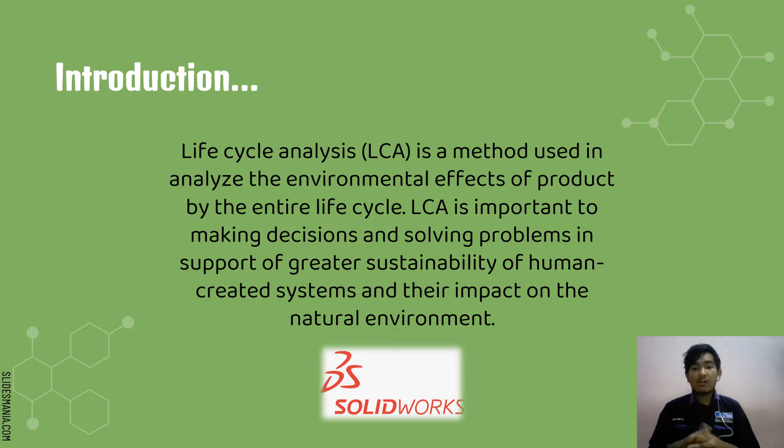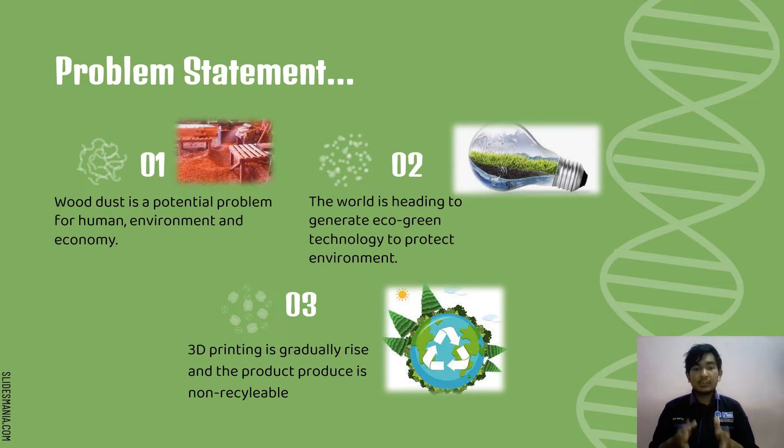This is my problem statement for my research. First, wood dust is a potential problem for human, environment, and economy. Second, the world is heading to generate eco-green technology to protect the environment. Third, 3D printing is gradually rising and the product produced is non-recyclable.

For the research objectives: first, to study and simulate life cycle analysis by using SolidWorks software. Second, to compare and analyze the life cycle analysis of wood dust reinforced polypropylene with polypropylene.

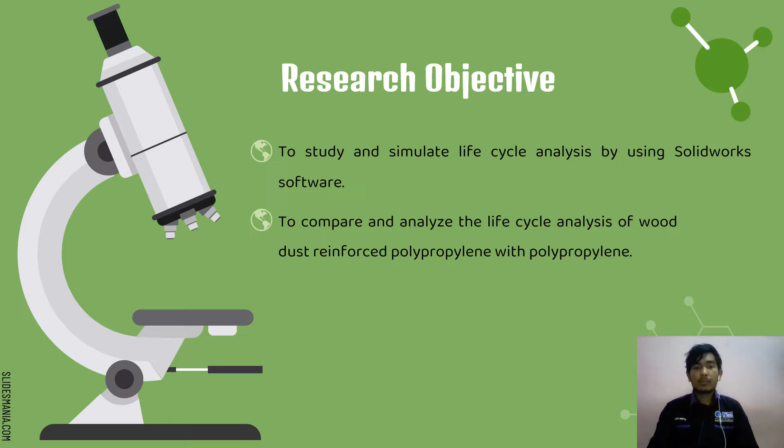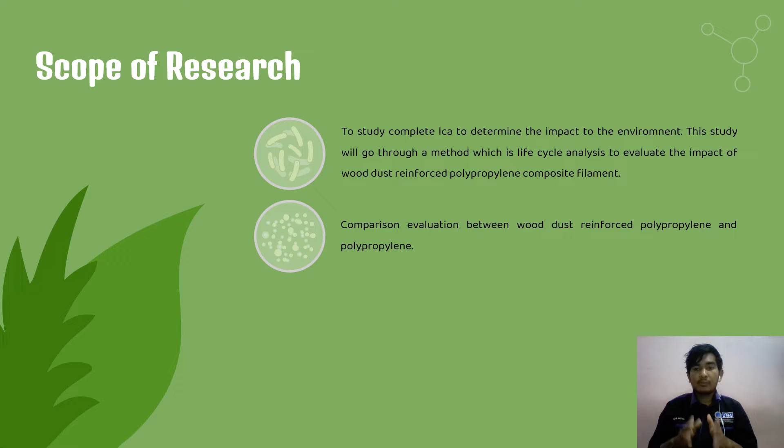This is the scope of my research. First, to study complete LCA to determine the impact to the environment. This study will go through a method, which is life cycle analysis, to evaluate the impact of wood dust reinforced polypropylene composite filament. Second, comparison evaluation between wood dust reinforced polypropylene and polypropylene.

This is the literature review for life cycle analysis. Guinée 2011 states that LCA is a means of evaluating the environmental effect of the production and use of goods, such as waste disposal or the provision of facility. Meanwhile, Saosee 2020 said that LCA is an ideal approach for analyzing the environmental effect of a product.

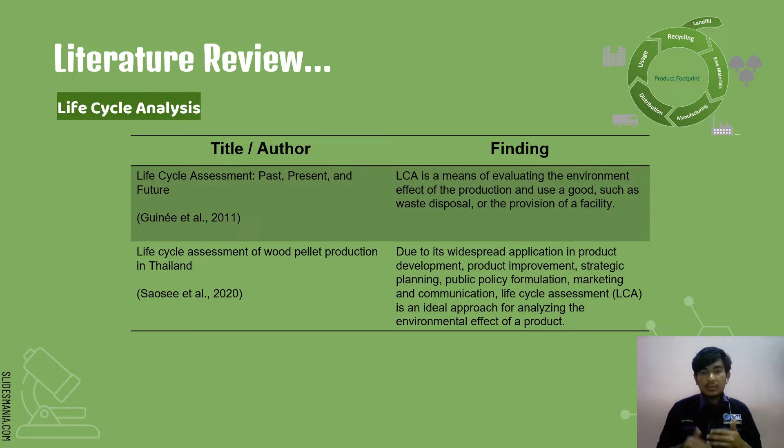For SolidWorks, Popa 2017 said that the philosophy of economic, social, and environmental responsibility is behind the sustainable design concept that should be followed by each organization. And Torctoru 2017 said that four concepts of sustainability are acidification, carbon footprint, total energy consumption, and water eutrophication.

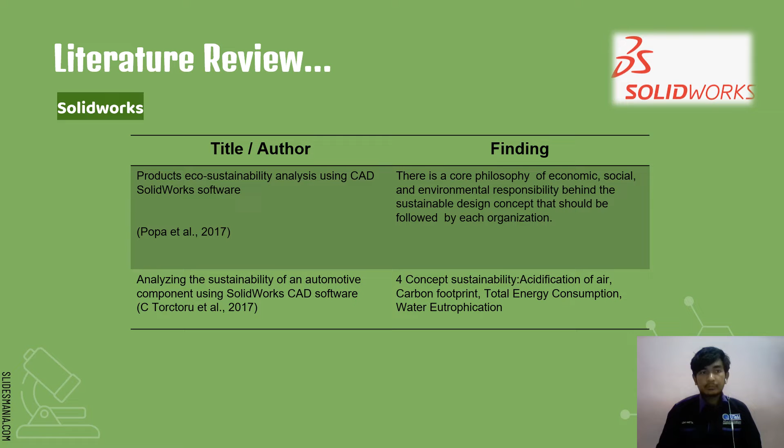Next is about filament. Arvind 2016 states that as we all know, 3D printing is a type of additive manufacturing that involves building a product layer by layer using plastic filament as the raw material. Yubo 2017 states that the disadvantages of 3D structure are high cost, low strength, and easy distortion, which restrict the application of FDM in cost effectiveness. Development of new composite filament for FDM is an important topic in the 3D printing industry.

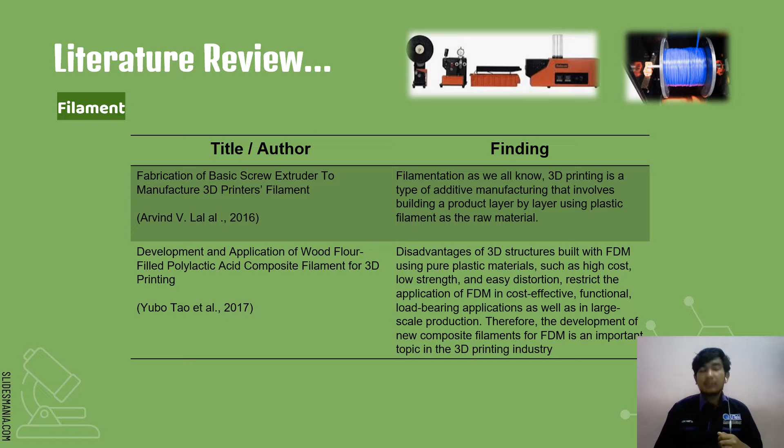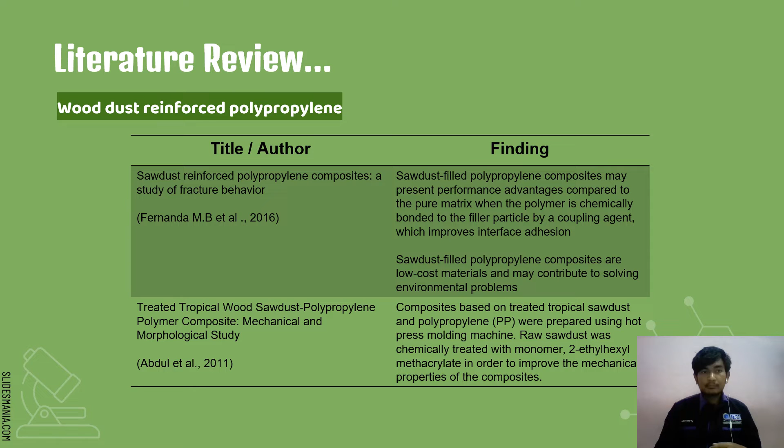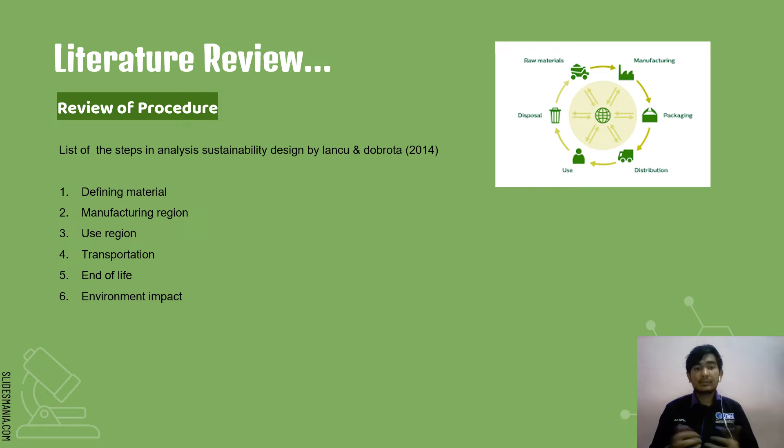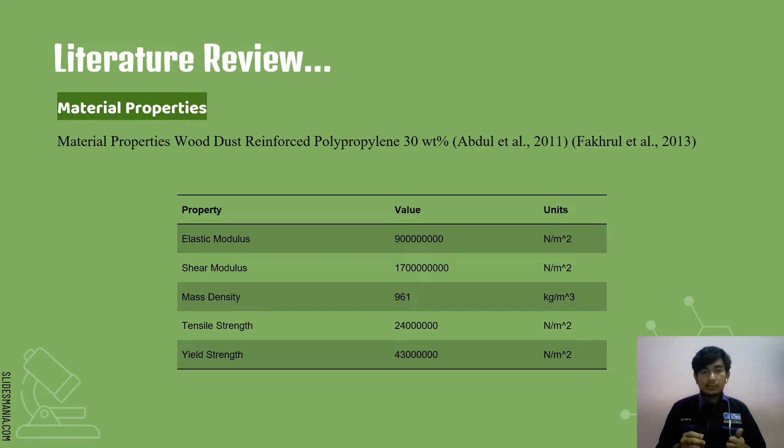This is the material properties of wood dust reinforced polypropylene 30 percentage by Abdul 2011, which has elastic modulus, shear modulus, mass density, tensile strength, and yield strength.

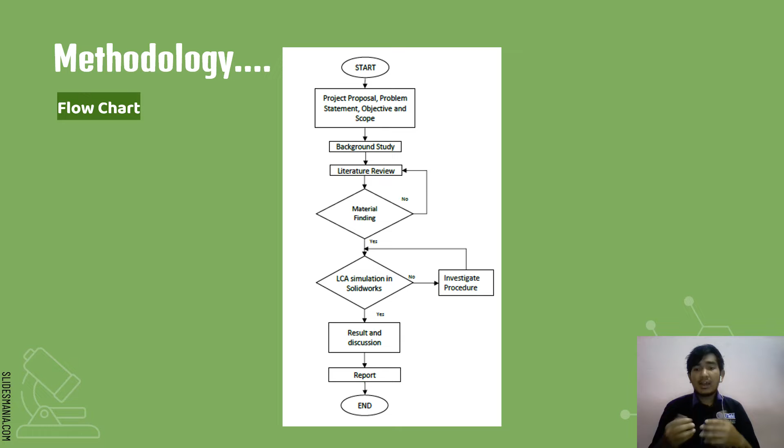If I cannot do the simulation, I will investigate the procedure to find out the problem, either in the parameters, material properties, or the version of the software. After that, I will generate results and write the results and discussion. After that, compile the report, and that's all.

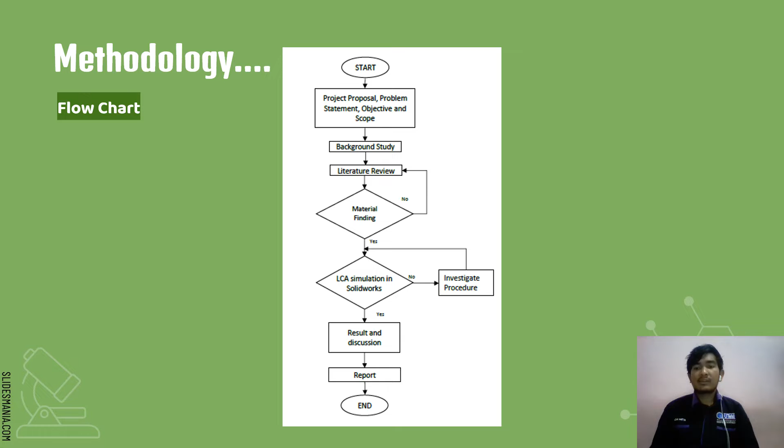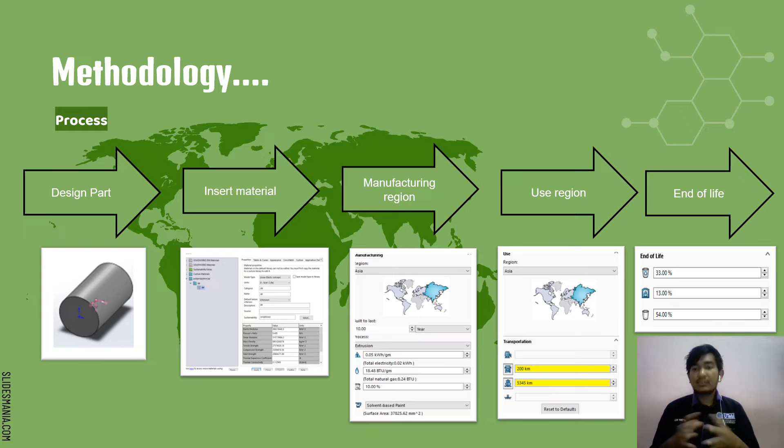So this is the process for my simulation. First, design a part and go through insert material, manufacturing region, use region, and end of life.

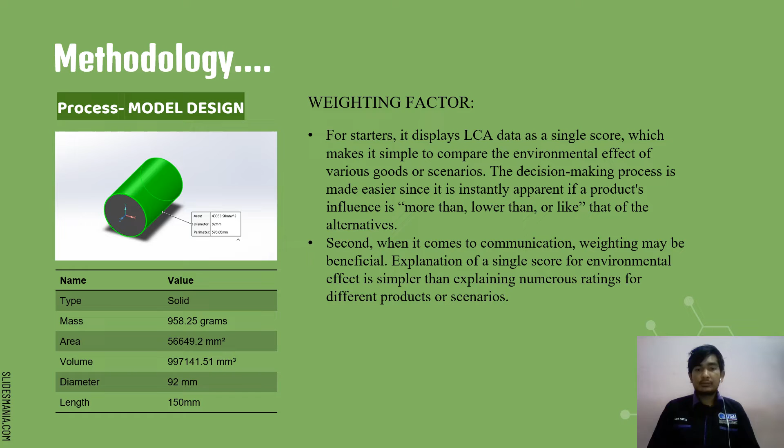So this is the process of insert material. The material properties of wood dust reinforced polypropylene that I use in this simulation is 30 weight percentage, which I found in the journal. SolidWorks software cannot conduct the simulation if the data is not enough, for example 15 weight percentage and 20 weight percentage, because the previous research only provided a few material properties. For polypropylene, homopolymer polypropylene has been set up as a baseline to run the simulation.

The function is to compare the data for the result. Al-Otaibi 2020 states that homopolymer polypropylene is used in many corrosion resistant constructions because of these features, as well as its chemical resistance and weldability, which make it a preferred choice for many applications. Different technological machines such as extruder machines are well suited for its application in this product.

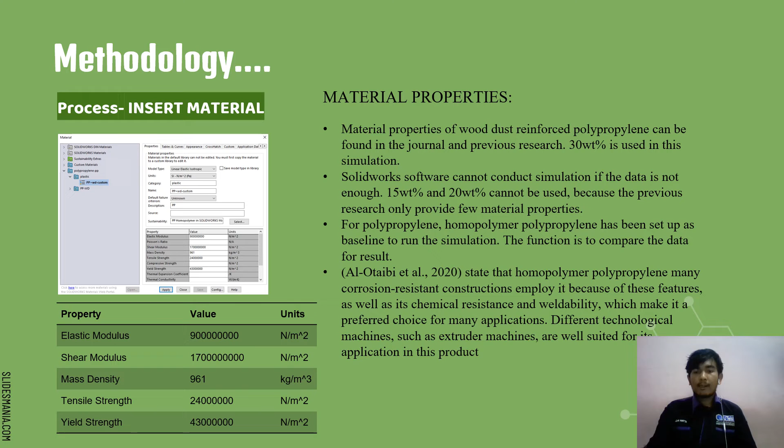So this is the manufacturing region. China is one of the biggest countries that produce filament for 3D printing, Peels 2014. In the manufacturing process, filament making is in the extrusion process.

The electric power used depends mainly on the size of your printer and the temperature of the heated bed and nozzle. The value of electricity and natural gas are provided by SolidWorks software based on the material process. The value of scrap rate is 2% and can be defined by tolerance cost optimization based on Hallmann 2018.

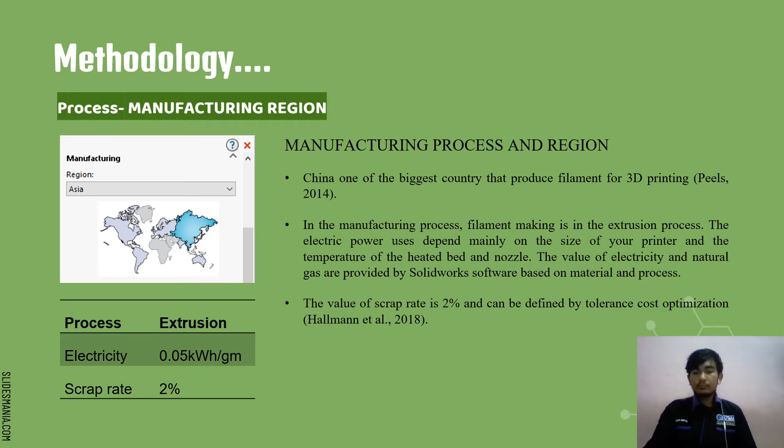So this is the use region that I have used, for example Malaysia as the use region. By the way, the greater the distance between two areas, the less environmentally friendly the product. For this use region, shipping takes 2000 km and lorry 200 km.

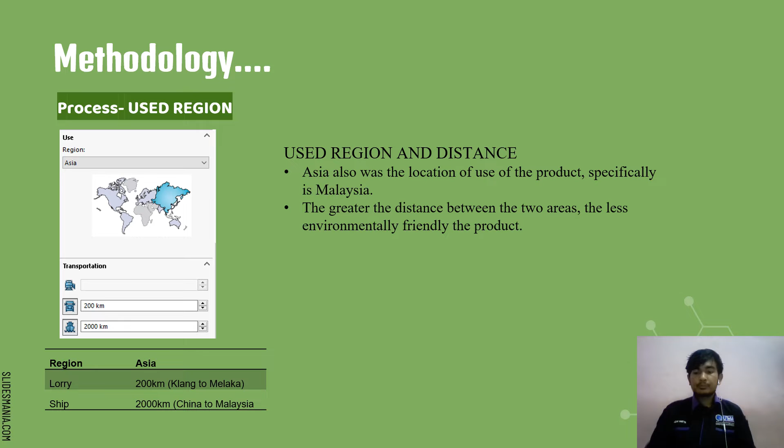So next will be the result and discussion.

So this is the environmental impact of wood dust reinforced polypropylene. CO2e means carbon dioxide equivalent, or the number of metric tons of carbon dioxide emission. Material releases the highest carbon footprint, with 2.6 kg CO2e.

99% of plastic based are made from fossil fuel. Fossil fuel produces large quantities of carbon dioxide when burned. Carbon emissions trap heat in the atmosphere and lead to climate change. If the material contains only natural fiber, it may have less carbon footprint.

So next is total energy consumed, in megajoules. Total energy consumed is 86 megajoules, with 95% from material. Manufacturing consumes 3.25% of energy, followed by end of life and transportation.

According to the Center for International Environmental Law (CIEL), plastic is among the most energy-intensive materials to produce. Ethane cracking is energy-intensive because of the high heat needed and produces significant emissions, as does the chemical refining process that makes other plastics. The mixture of plastic and natural fiber can help reduce the use of energy, especially in manufacturing.

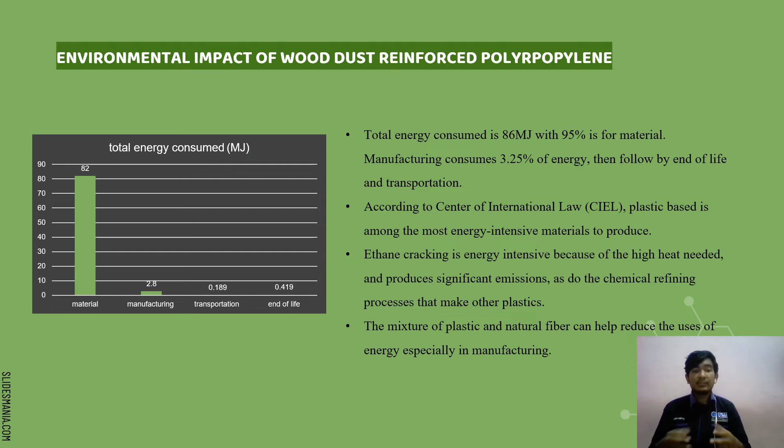So next is air acidification, sulfur dioxide. The total air acidification produced is 7.2 times 10 to the negative 3 kilograms of sulfur dioxide, with 72.22% from material. Air acidification mainly consists of pollutants emitted by the combustion of fossil fuel, for example burning, deforestation, and power generation. The material of plastic and wood gives a high impact on air acidification.

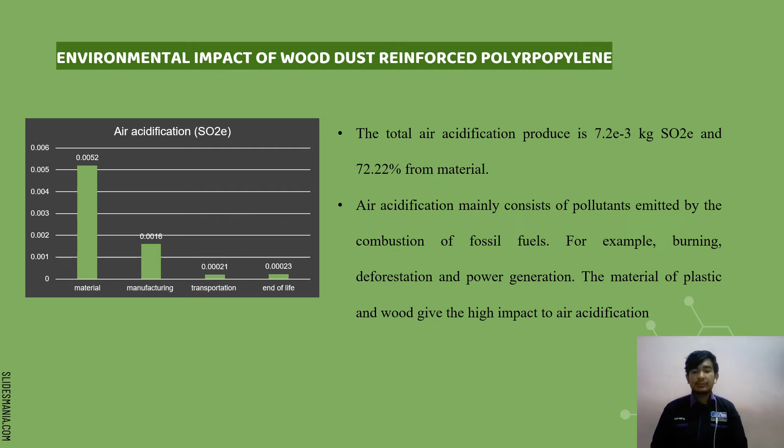So lastly, environmental impact is water eutrophication, PO4E, standing for phosphate equivalent. Phosphate equivalent is a measure to estimate the eutrophication potential of a substance. The substances are converted to the same amount of phosphate with the same eutrophication impact.

End of life leads the rank of water eutrophication with 65.3%, from 0.0015 PO4E, followed by material, manufacturing, and lastly transportation. Eutrophication of surface water from industrial and municipal wastewater often results in the destruction of many natural water bodies around the world. Nutrients like nitrogen and phosphate encourage such eutrophication.

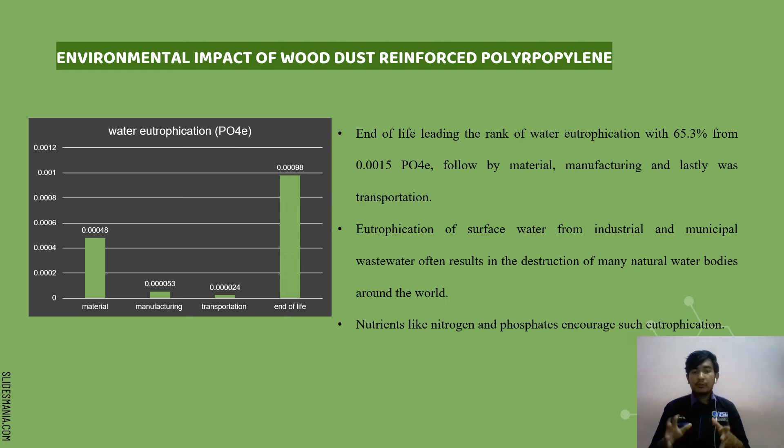So after this, I will discuss the comparison between wood dust reinforced polypropylene and polypropylene.

The first will be carbon footprint. The carbon footprint released by wood dust reinforced polypropylene decreased by 35%. This is because polypropylene is a type of petrochemical. The higher the use of petrochemicals, the higher the carbon footprint released.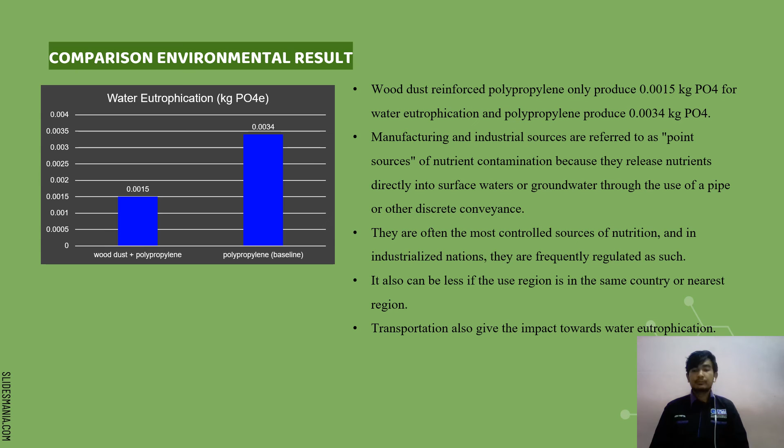So as a conclusion, the simulation of the life cycle analysis for wood dust reinforced polypropylene is very important to know how far the composite can save nature in the future. By using SolidWorks software, it can help recognize the suitable situation and process for life cycle analysis.

Based on the research, Thyavihalli Girijappa et al., 2019 state that the usage of composite material reinforced with natural fiber is eco-friendly and can save nature from any pollutants. 30 weight percentage of wood dust with a mass of 958.25 grams filament produces less emission than 100% weight percentage polypropylene, based on the simulation result.

The increase in awareness of the damage caused by synthetic material on the environment has led to the development of eco-friendly materials. As a conclusion, wood dust reinforced polypropylene gives a better impact than polypropylene at all levels. The production of filament using the composite material is suitable for the long term of our environment. Therefore, the objective of the project had been achieved.

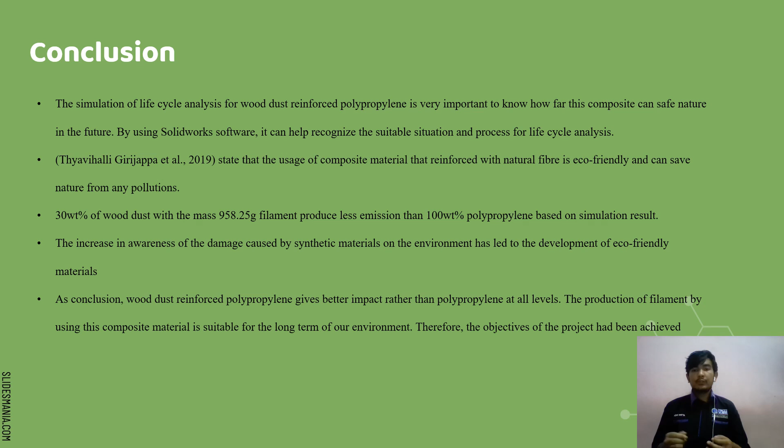So as a recommendation, I do recommend doing mechanical testing of the material, such as the strength, strain, melting point, and some more. Making filament using the composite material. And the last one, making a simple product to prove the success of the material.